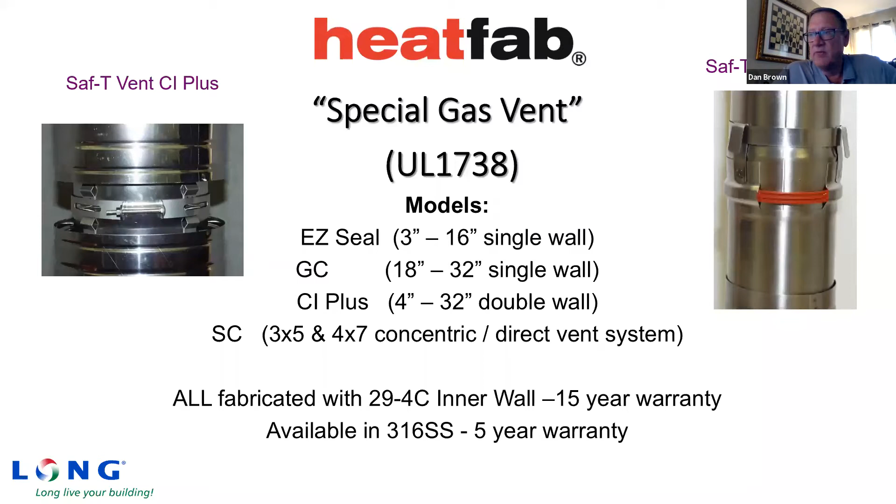That used to be called AL 29.4C. They've lost their patent, so that's why it's 29.4C—other mills can make it. It's also available in 316 stainless steel. As you can see, the big difference is going to be the warranties: 15-year for 29.4C, 5-year for 316 stainless. All of them, 1738, is positive, negative, and neutral pressure.

The directional pipe, a lot of people have asked, is it multi-directional? No, it's not, because we have to maintain the inner walls going down so the condensate rolls to the bottom, towards whether we have an intermittent drain or back into the appliance.

The double wall, we can do double wall, insulated double wall. All of our only choice is 1-inch with this product. We run it, we are tested through 550 degrees. If your condensing appliance is putting out more than 550 degrees, we've got a problem. All of our products are high quality, built for durability and long life.

The double wall products are the majority of what we sell.

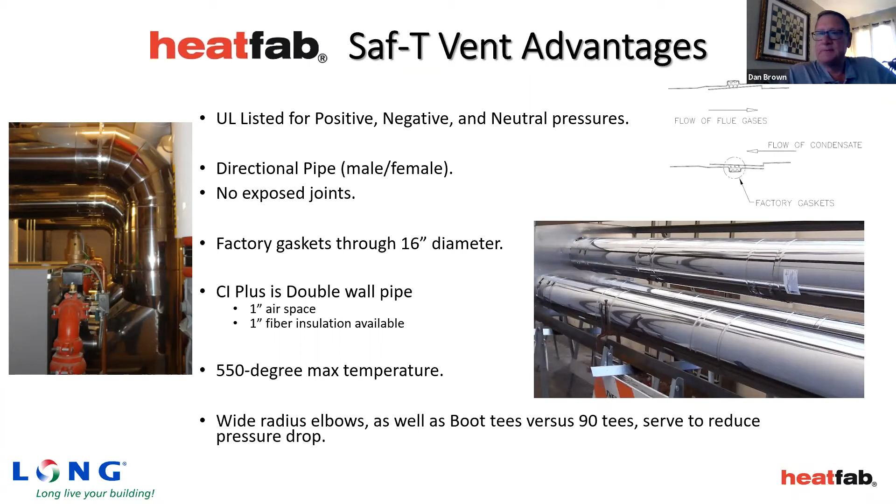Once you either ask Long for a quote, if you send your information in—I did send Destry this request—what we can do is, with a sketch or blueprint, run a calc as far as ensuring that the sizing is proper. As long as we've got all the information, the design CO2 and the allowable back pressure, those are the things we need specifically from the engineer so we know exactly what it is that we can size it to, and then we give you a full report. Also, when we receive a PO and/or a design that needs the CAD, we can provide the drawing in CAD and 3D CAD as well.

That's the big thing, being able to get this information to our design engineers so that when they design it, they can double check and make sure the sizing is correct, as well as make sure they've got all the correct fittings to include in the quote.

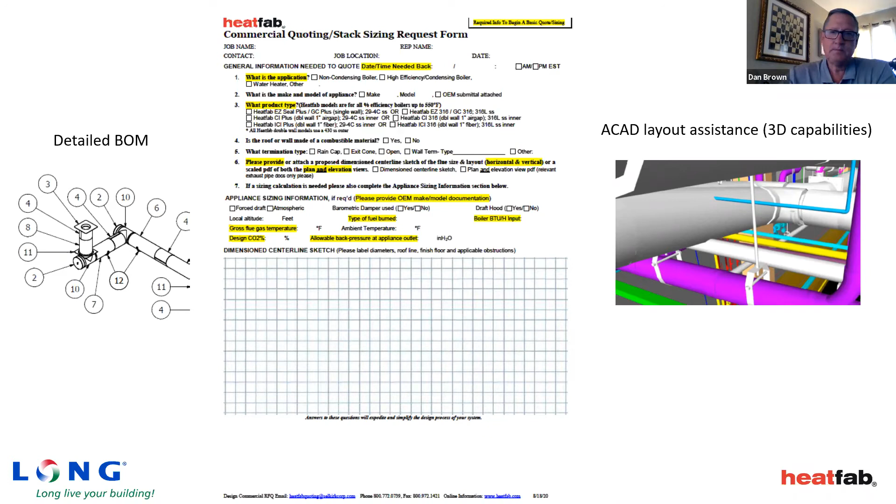Moving on to the Ampco products, which can be for a condensing appliance. If we use the 316 stainless steel, we do maintain the UL 1738 with this, as long as we use the special sealant that we have to include for our flanges on this product.

The Ampco pressure stack is single wall all the way up to 4-inch insulated double wall. All of our product is UL tested. The stainless steel interior can be 304 or 316 stainless steel. Our outer walls for this product—obviously the single wall doesn't have an outer wall—but the VSI are 1-inch airspace, aluminized steel, 304 or 316.

Depending on what the ambient conditions, the ambient area is needed. A lot of times what we'll see is the aluminized steel on the inside of the building, and then when you exit the building, we can transition to 304 or 316 stainless steel.

All of these products, the single wall, the double wall insulated, it can all be interchanged. The reason it can be interchanged is all of our structural is based on the internal walls. All of our product goes to 48-inch, and it is tested through 1400 degrees.

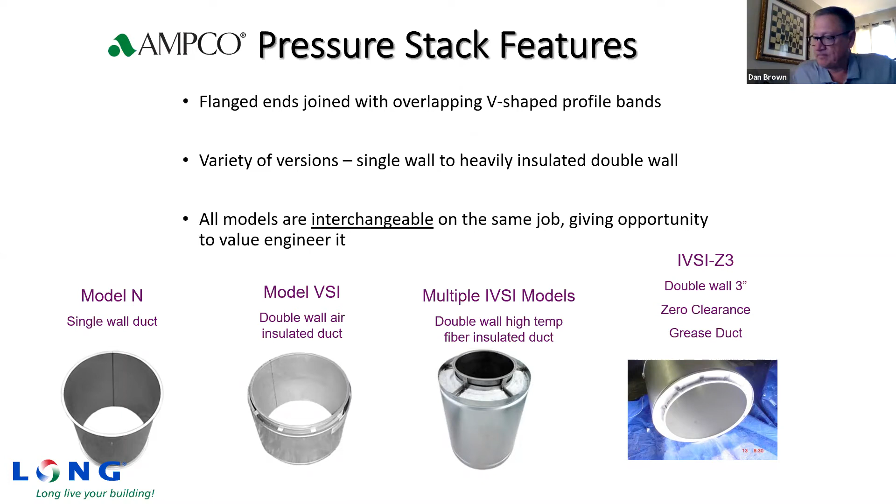So this product is not just boiler flue, it's also grease duct. Our grease duct is tested to UL 1978 and UL 2221. 2221 is the 2-hour integral fire rated shaft, so when you use this product, you don't need to have a 2-hour shaft around it.

That's the 3-inch insulated and also the 4-inch insulated. The reason there's a 3 and a 4-inch: the 4-inch used to be the old standard when factory built grease duct was first brought out. Then testing brought it down to where 3-inch is the gold standard. 4-inch is just because there are old specs out there that you have to comply with. But as far as the rating, both the 3-inch and the 4-inch do meet the 2-hour rating.

The UL 1978 is the grease duct standard. It's all tested through 2000 degrees. All the components and accessories, the cleanouts, everything else you need for a standard grease duct setup, we have.

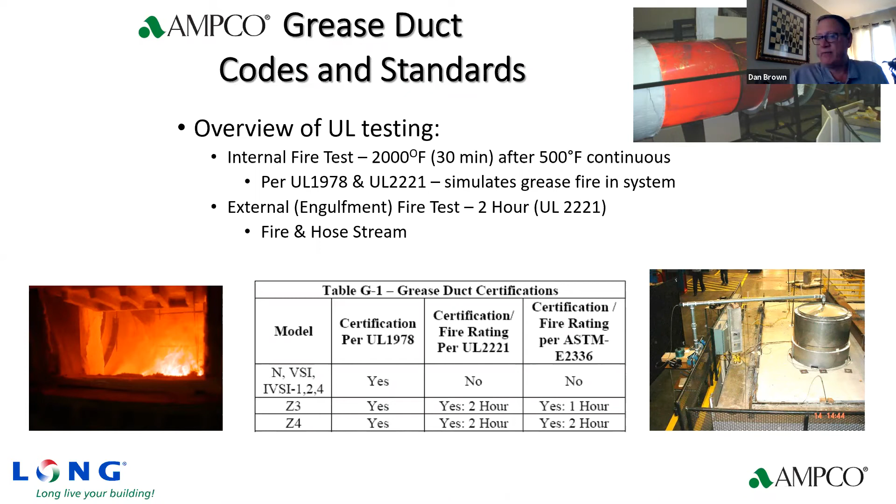Then we get into generator exhaust, engine exhaust. This is something we see a lot more of lately, especially with everything going to enhancing the grid and backup power systems for data facilities. The UL testing design is different in that on a standard grease duct or boiler flue application, we can use adjustable lengths that are 2 pieces that slide together, in and out of each other.

With the engine exhaust, because of the potential for fumes going through that slip joint and the explosive nature of the engine, we have to use bellows joints for thermal expansion. There are a lot more solid connection points when you're talking about engine exhaust, generator exhaust.

In between each of the plate supports, if you look at the picture on the right, we've got the all-thread coming down to that plate support. So in between any fixed point, the plate support and the generator, we've got a bellows. Up above, there's going to be another bellows. So in between all of those fixed points, we've got a bellows, so that we don't blow the ductwork up if there was to be a backfire.

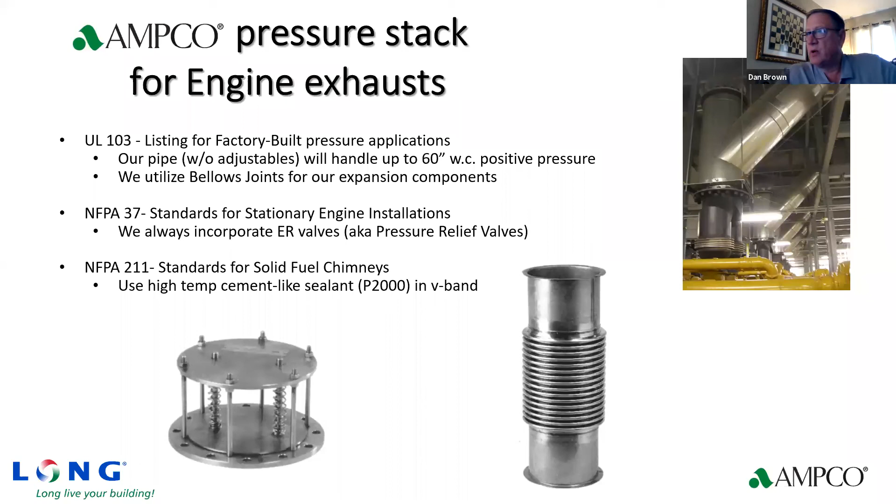We've got the pressure relief valve to make sure that no damage comes to the ductwork in the event that there is a backfire.

The next product we use, the same Ampco product, is something relatively new. What we've done is taken our 2-hour 2221 rating and put it to be a multi-story exhaust system. This can be utilized for laundry exhaust, multi-family kitchen exhaust, and multi-family applications. The 2-hour rating doesn't go for the kitchen exhaust, but for the bathroom exhaust and laundry exhaust we can maintain the 2-hour rating.

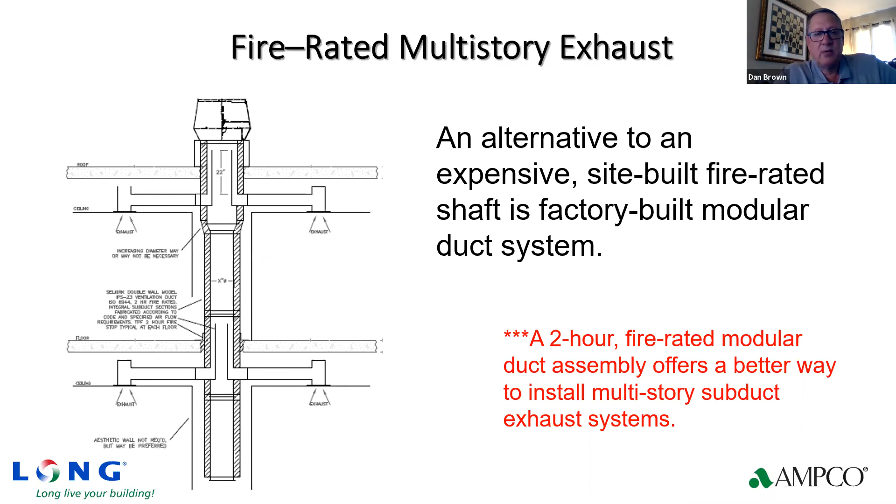This product has been tested through 36-inch. The subduct that is used means you get away with not being able to use the fire damper or fire smoke damper, just like you would in any other system that uses the subduct. That's where the internal duct rises, I believe 18 inches above the opening, so that smoke and fire don't go back down through it, eliminating the need for a fire damper.

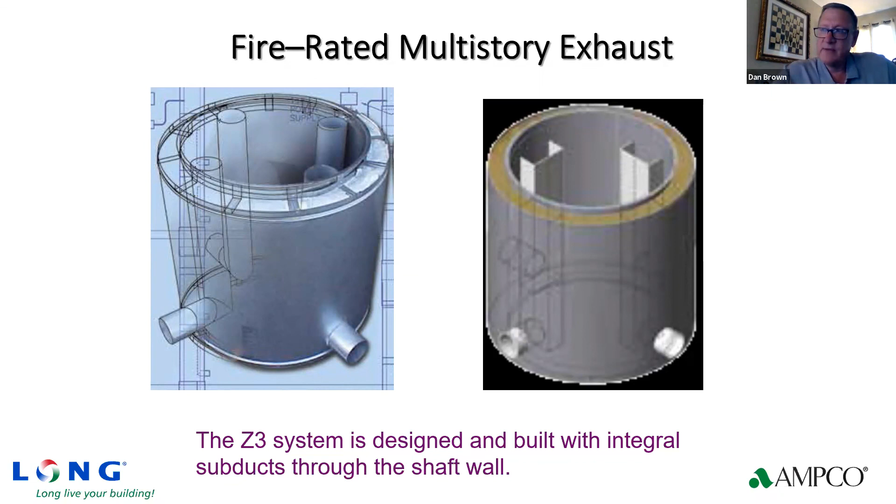This product can have the internal stainless steel, 304 or 316. But what we've done for most of the multi-story exhaust systems is use aluminized steel on the inner, maintaining the same flange system so we can maintain the 2-hour rating. We've just changed the product so that we don't have stainless steel, to reduce the cost.

As I hopefully showed you, Ampco is not just boiler flue. We've got engine generator exhaust, kitchen hood exhaust, grease duct. We've got pizza ovens, I've sold it for coffee roasters. The big thing on coffee roasters is we need to make sure we know the different end pieces when we come off of the afterburner, because the afterburner on a coffee roaster, who would have known, is 1400 to 1450 degrees. We've also done process ovens and many other things.

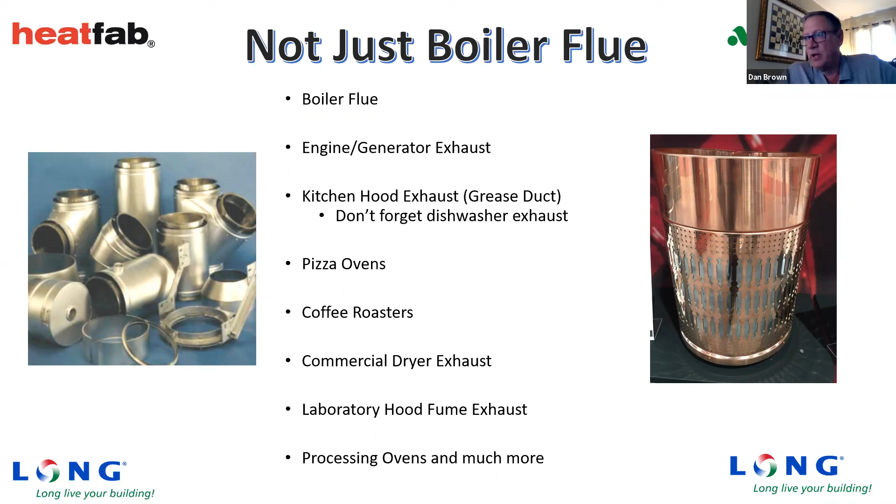Another thing to think of: because laboratory exhaust systems are utilizing stainless steel ductwork, with our system it is a leak-proof laboratory duct system as well.